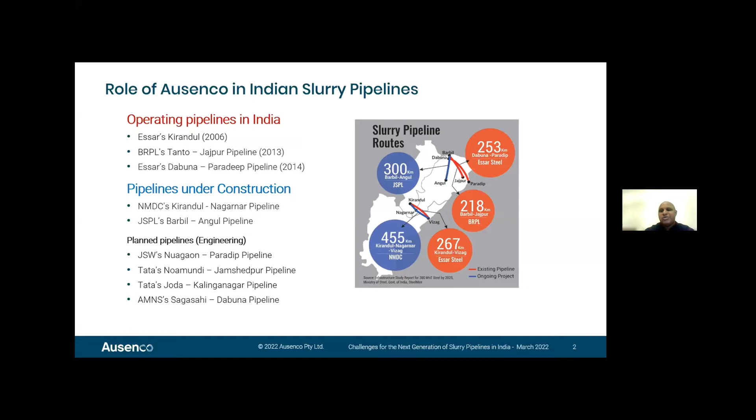Next slide, Julie. So, okay, we talk about 300 million tons. I've been hearing that for many, many years now. But what does it practically mean? It's great to talk about it. So what are we talking about? To make a ton of steel, we need about 1.6 to 1.7 tons of iron ore. So we're talking about transporting 500 million tons of iron ore to the steel making facilities.

Which means if you look at about 15 million tons of capacity per year, we're talking about 33 slurry pipelines to be commissioned between now and 2030, which is about 4 a year, which is very, very ambitious to say the least. And obviously, slurry pipelines need a lot of water. We calculated that we need about 45,000 cubic meters of water an hour to transport all this slurry to the iron and steel making industries.

And whether it is fortunate or unfortunate, Odisha is the heart of the iron mining operation in India. Majority of the pipelines that we deal with are being planned in Odisha, especially in the zone between the Barbil area and the coast of Odisha, be it Paradeep or Dhamra or any other area. So that's where most of the action is with respect to slurry pipelines and the iron ore industry.

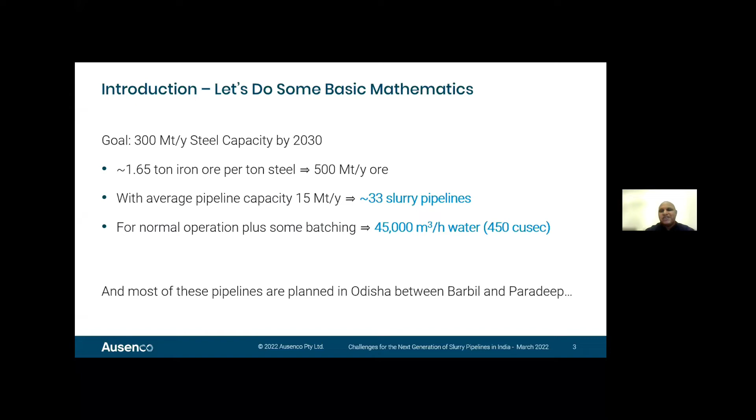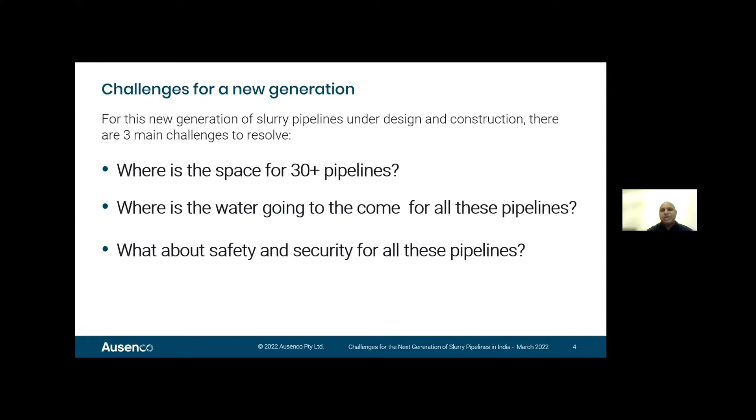So for me, if we cannot answer these 3 questions, then the dream of 300 million tons will become difficult, if not impossible. The 3 questions we face all the time are: where is the space for these 30 plus pipelines? The second question is, where is the water going to come from for all these pipelines? And what about the safety and security of all these pipelines? We think these 3 are the biggest challenges in achieving the goal, and we would like to address them in a bit of detail going forward.

Next slide. All right. So slurry pipelines are now primarily being planned in the national highway right-of-ways, which facilitates the permitting with a single agency. However, many of these projected 30-some pipelines would be concentrated in the same area, as Raj mentioned, and only the first few are going to find space in the national highway right-of-way. Additional areas are going to need to be developed, such as the right-of-ways of secondary roads, railway lines, and potentially even the development of some wide common corridor cross-country, where multiple pipelines could be installed in parallel.

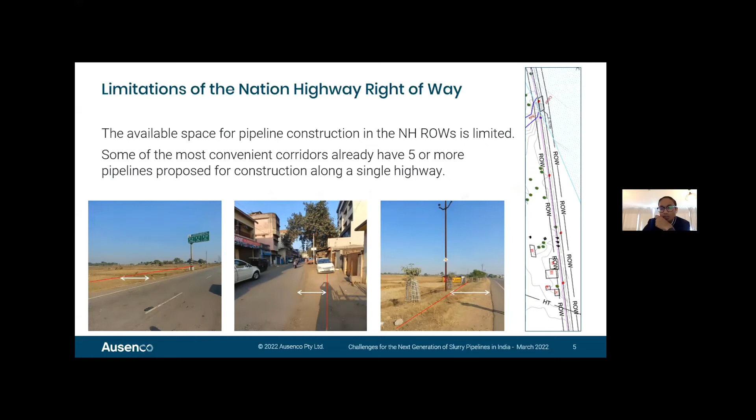Mr. Dwivedi, you need to keep it on mute, please.

So one solution to this lack of space is common carrier pipelines, in which multiple companies would transport their product in the same pipeline instead of in several smaller pipelines. And that saves a lot of space in the right-of-way, as we can see with these images. All of these images of trenches are for 30 million tons of ore. We can carry it in one large pipeline or a bunch of small pipelines. Common carriers take good advantage of the available space that we have.

So another pipeline system that's actually operating that uses this philosophy is a phosphate slurry pipeline network in Morocco that you, sir, mentioned earlier. This phosphate slurry pipeline network is a common carrier for 4 different product grades of phosphate. There are 4 plants producing materials and 4 short pipelines bringing things to a central location, and then a 180-kilometer long distance pipeline that transports the material from the interior of the country to the coast.

So the benefit of common carrier pipelines is that you can use larger diameter pipelines, and the larger diameter pipelines have lower friction losses than smaller pipelines. That results in lower cost per ton of ore transported in terms of both capital cost and operating cost. If we look at the numbers here, these estimated numbers for different size pipelines, to triple the capacity of a pipeline, to use a larger single pipeline, only requires about double the cost infrastructure. So there's really a financial advantage to going to larger common pipelines.

Additionally, you can see the comparison to rail and trucking. The operating cost of slurry pipelines is drastically lower. It's so low, in fact, that the return on investment for the capital cost of slurry pipelines is only a few years in comparison to the cost of the tariffs for transporting material by rail or trucking.

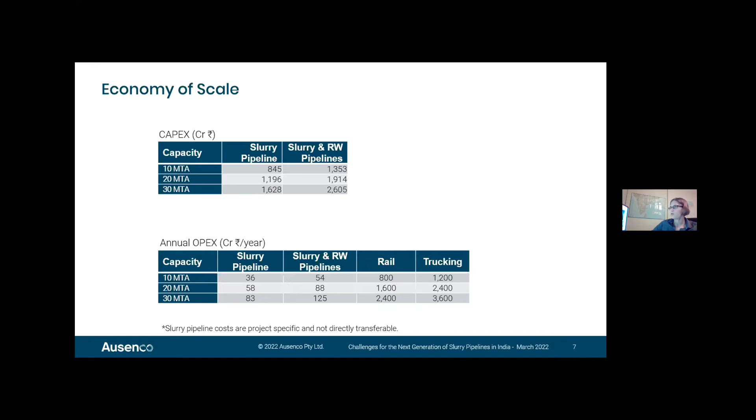So to find the space that's needed to install all of these pipelines, we have to look at more space to be made available, in particular in right-of-ways of secondary roads, thinking of developing common cross-country right-of-ways, railway right-of-ways, and also to make the best use of the limited space available by looking at common carrier pipelines, which would be a new concept for slurry pipelines in India, but we think it's something that's possible.

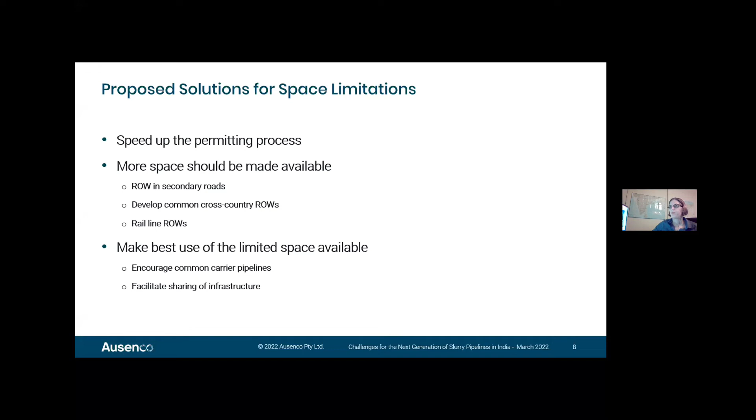So the next issue that we want to address is the water scarcity in the future. Since these iron ore deposits are concentrated in the same area, that means the pipelines are concentrated in the same area, and the water that needs to be drawn from rivers is going to be concentrated in the same area. It's going to be drawn from the same rivers. For this 500 million tons of iron ore that we need to transport, we need 450 cusec of water to transport the iron ore in a slurry.

As climate change continues and as more pipelines are built, water may not be sufficiently available for all these pipelines, especially seasonally. If water is not available for the pipeline transport, that stops the transport of the ore. So we want to think about alternative sources of water to provide stability and security for slurry pipeline operations.

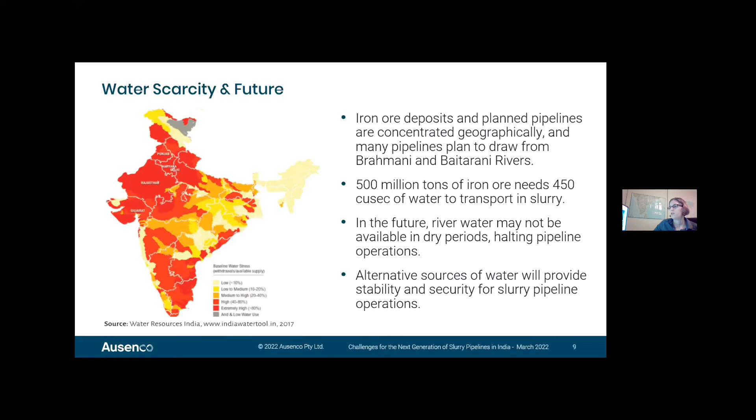So options for that are return water pipelines, which reuse the filtrate removed from the slurry at the end of a pipeline and return the water back to the pump station in a sort of closed circuit system. So we're not losing so much of our water; we can recover a very significant amount of the water and reuse it in a closed loop.

Another important solution to think about is an alternative source of water, which would be desalinated water. Many other countries are using desalinated water for their mining needs, in particular Chile, Peru, Australia, and also again the phosphate pipelines in Morocco. They are currently developing desalinated water pipelines.

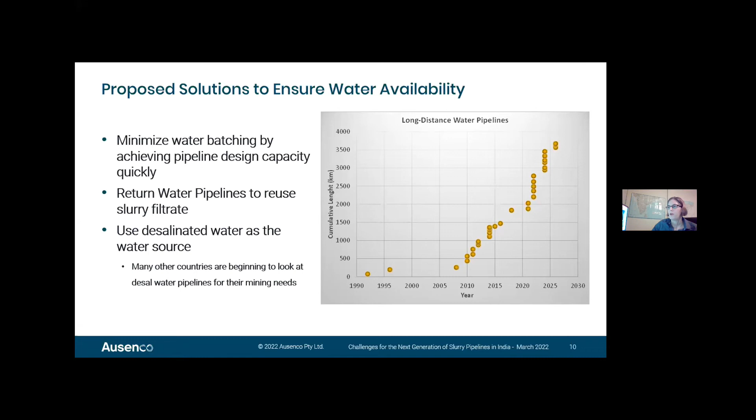You're mute. Yep, sorry. Okay.

So we made space for constructing the pipelines. We made sure that the pipelines have enough water to operate. But what really keeps me up at night is what you're seeing on the screen. In fact, the picture to the left is a leak of the Minas-Rio pipeline, the current largest pipeline for 25 million tons. They actually had 2 leaks back to back.

And the government imposed a fine of about 40 million USD, which is about 300 crore rupees. And the operational loss because of lack of production is about 2,000 to 3,000 crore rupees. The picture to the right, maybe most of you have seen it as well, is the Samarco Dam Failure.

They had a settlement of about $2 billion, 15,000 crore rupees, and God knows how much money they've lost because of operational shutdown. I mean, we are planning all these pipelines next to highways and railways. Imagine, and these are all high pressure pipelines. We're talking about 30 million ton pipelines.

Imagine if this leak happens in the middle of the night next to a highway, and then causes some kind of an accident. It will not only shut down that pipeline, it will shut down all the pipelines in the area. And if the steel industry and the pellet industry are going to depend on pipelines, the whole industry may come to a halt.

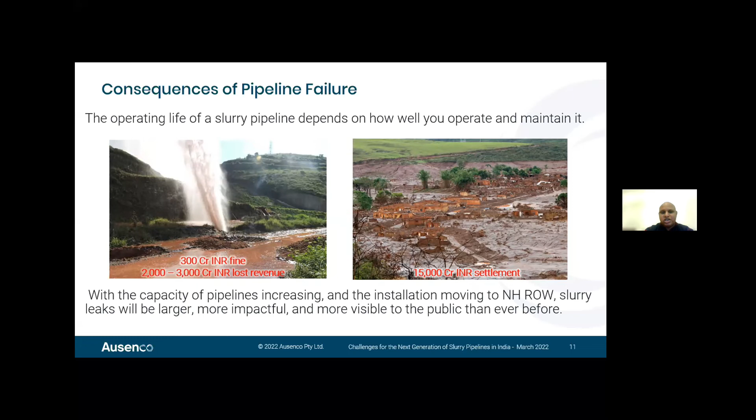So for us, this is an issue which needs to be addressed really quickly and should be given a good thought, because unfortunately, the mining industry still treats long distance pipelines as a tailings pipeline. I mean, I've seen conversations equating long distance slurry pipelines to a water pipeline or oil and gas pipelines.

One thing people forget is slurry pipelines carry solids, and solids abrade the pipeline and can cause leaks. So they're very different and need to have very different operating practices and maintenance practices compared to an oil and gas pipeline or a water pipeline.

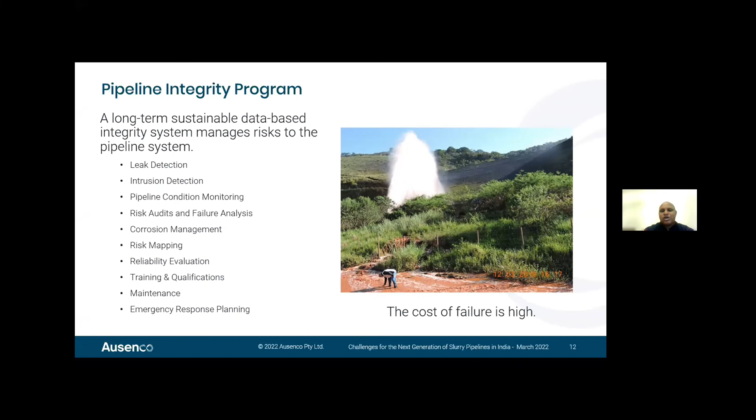So we strongly recommend that each slurry pipeline coming up have leak detection, intrusion detection, pipeline condition monitoring, risk analysis, risk mapping, a really good training program, a really good emergency response plan, and a really high-level pipeline integrity program so that everybody knows what the condition of the pipeline is. Because a failure of one pipeline is not only going to affect that pipeline, but all the pipelines.

So we strongly believe and recommend that this should be a policy. I feel like the government should actually insist that all slurry pipelines be audited on a regular basis. It may be a bit difficult to implement, but I think for the long-term benefit of the industry, for the long-term success of the industry, it should come from the government. I think they should have standards for the operation of a slurry pipeline.

In fact, right now, the construction of the pipelines follows API codes and ASME codes. But I think for Indian conditions, we need codes and standards and operational practices tailor-made to Indian pipelines. So, as Ausenco, we are really happy and willing to actually contribute to that.

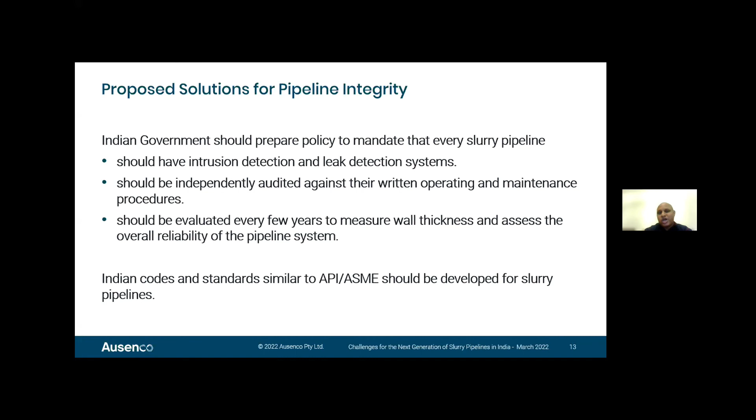But I feel like, for me, this is one of the biggest risks, which is still not addressed properly, because there are so many pipelines planned so close to each other that this actually keeps me up at night. And it is my biggest worry that I should not wake up one day and read, as Mr. Deepak said, in the Times of India headlines that a big pipeline leak caused this accident. So this is one area where industry and government should have a really big focus.

And with that, I just want to summarize that for me, the three big items are, first, the space for the 30 pipelines. It should be a common carrier pipeline, and more space should be made available by allowing pipelines in rail right of way, or even a specific cross-country right of way, especially in Odisha, with so many projects coming up, because there is simply not enough space to put all these pipelines being planned right now.

Water is an extremely important issue because of global warming and the lack of availability. Definitely a return water pipeline or a big desalinated water pipeline from Paradeep to the Barbil area. In fact, that pipeline could be a 2-meter diameter pipeline, and that water could be shared by multiple iron and steel making industries. So if there is a spirit of cooperation, the water problem can easily be solved.

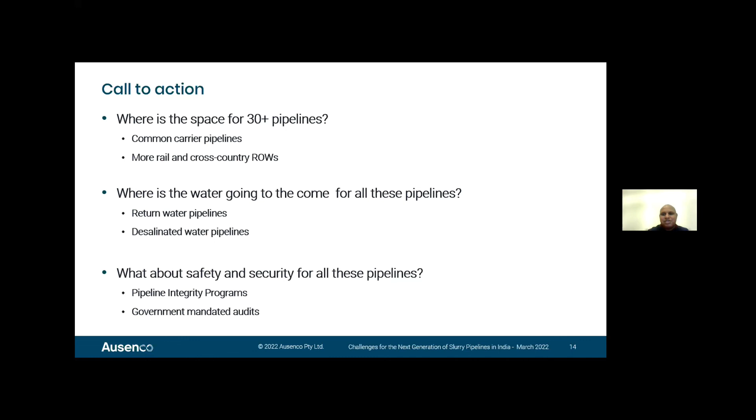And the third and one of the most important items is there should be standards to make sure that the pipelines operate safely and securely, so that it doesn't affect the entire industry. So, well, our motto is pipeline dreams do come true, and Ausenco is there to help you make your dream come true of achieving this goal of 300 million tons of steel by 2030.